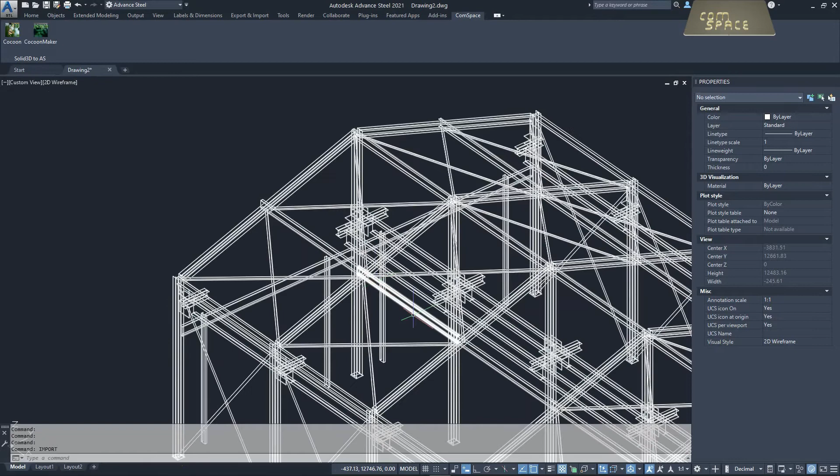Let's see how it looks like. So it looks a little bit like this here. It might have been drawn with an older AutoCAD, might have been drawn with any other CAD application.

So we're not quite sure about these sections. We just know that, well, we live in Australia, so obviously they might have used some Australian sections for this. It might take a little bit of a while to trace this even. It's very repetitive, the design, but well, we want to quickly BIMify this, get a couple of parametric sections out of this source, and we want to see how Cocoon behaves.

So let's get started here. We can work here with our default compiled file.

If you want to specify any project specific or any other files optimized for your environment, because you do a lot of mining, you work with a lot of guys working with some other CAD applications, you can optimize this or reduce the amount of sections it should use as a comparison to find the right section. In this example we are happy.

Let's use the boundary method. Why not? Do we want to have the system line on top? Yeah, why not? Might be maybe also an option.

Because it was probably drawn with an older CAD application, we could assume maybe that any fillets or others are not included, just for simplicity. Maybe it's even a total SolidWorks file. So we have here our tolerance set to 5%, for example, and then accept it.

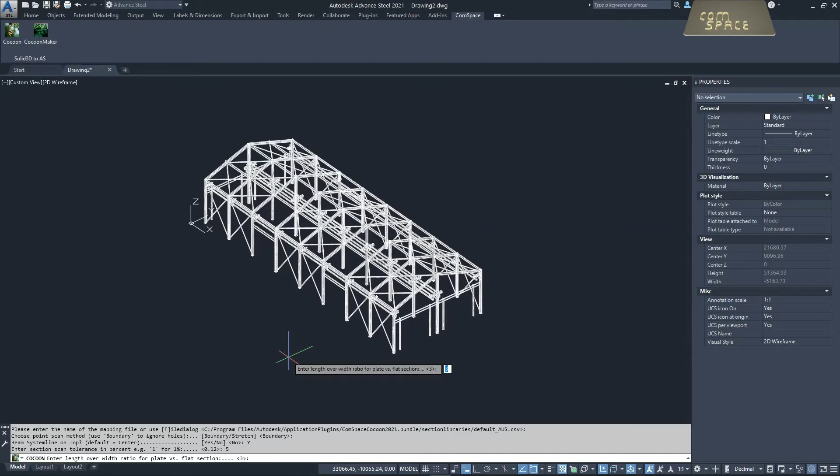And so this gives us a bit the boundary. This means that we have here the bottom plate, for example, that this becomes a plate and this does not become a flat section. It tries to find a flat section for this, but it might be that this bracing here will become a flat section ideally. So we can here speed up this process a little bit. Hence we have here the option to specify this. Let's leave this at 1, 2, 3.

And then we have the next question. So a ratio of 3 is okay, 1, 2, 3, and so this was with our length. So enter the maximum plate thickness.

This is here being thought of. So if we have, for instance, solid blocks underneath, or not every concrete foundation is being turned into a plate, because we want to consider this as well in our multi-selection. So we have here the option to specify, okay, plates go up to 20 millimeters. If you have 34 millimeters or something awkward odd, just please leave it, drop it, mark it please with red. I will have to sort it out in a second go.

All right, so it gives us a little bit of a first feeling. So the maximum what's available in the workshop, we can enter here as well. I have just left it here by default to 20 mil.

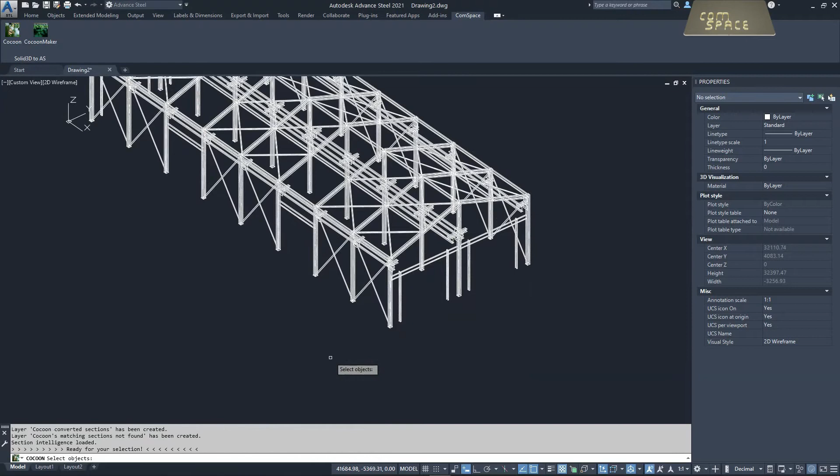Great, so process effects by layers is very useful. And then we can select here all these, whatever, 100 sections, 400 sections it has found, and process with a tiny enter. Great, so it will probably find a few sections, some not.

Let's see how many it found. So when we, for instance, select these, okay, we have 2, so it seems to be quite accurate. So 1 solid, 1 beam. We have here, upsala, and solid. Let's see, come on, be nice to me.

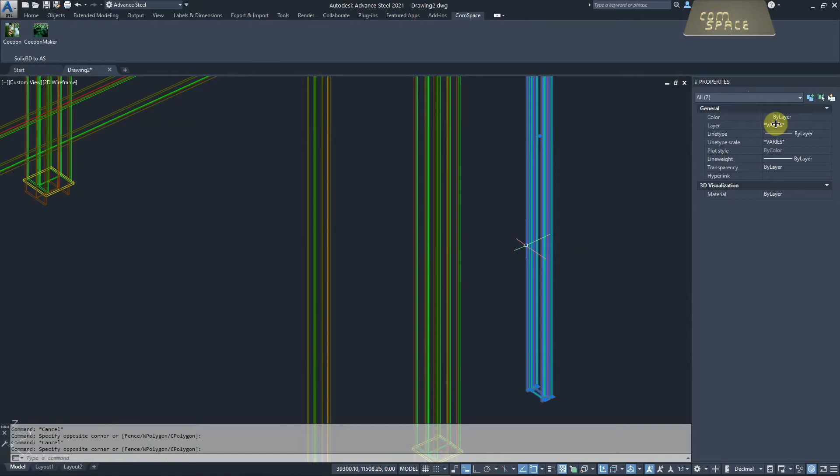What kind of beam do we have? 250, you see, good. What do we have here? Also a beam.

200 PFC, for us, kind of looks all right. Just maybe here it's a little bit flipped, so we can do this. And for the positioning, quickly mirror this the other way around. Apart from this, it looks actually pretty cool.

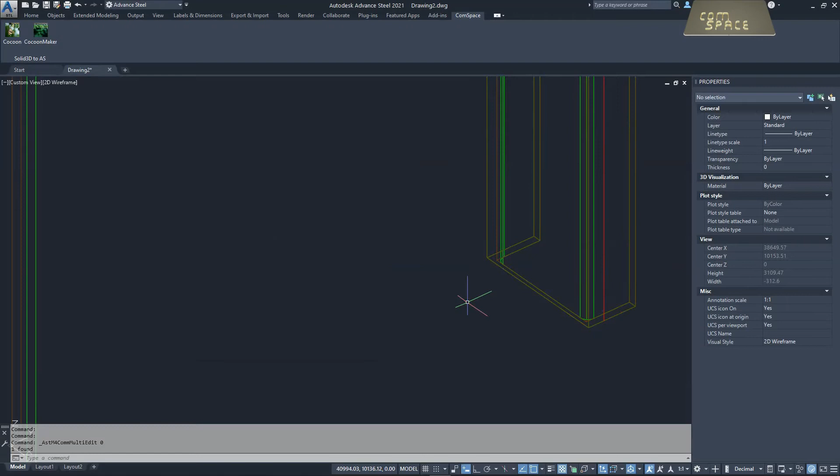It has also here, for instance, the section line, the system lines from our section on the top. We have also here the system line on the top, pretty nice. So if you have this as a workflow, this works.

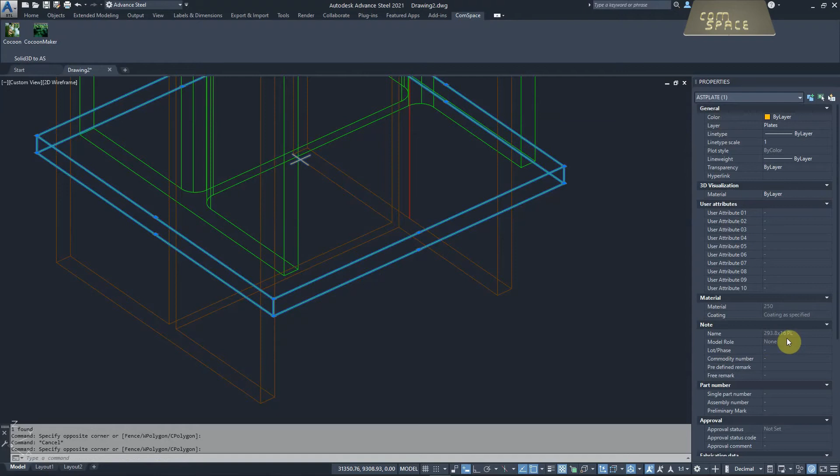It has clearly identified here the base plates as plates in its size. So maybe we still need to correct this a little bit, but well, it is parametric, as we know. Great. So we could then add this afterwards anytime.

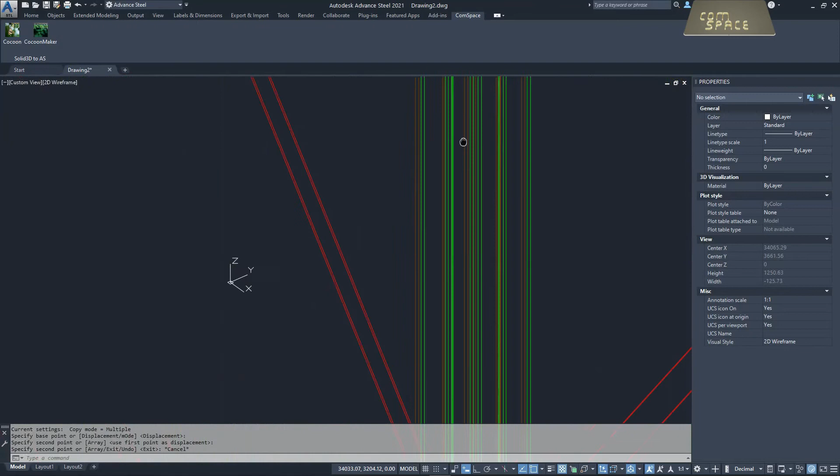We have here some red sections, and let's quickly inspect this, what we have here with the red ones. So I'm just copying this thing a little bit out to inspect this a little bit, and it looks a little bit like a PFC, but well, the PFC would be a little bit thicker. There's the flanges, so it would be a little bit more.

Let's quickly double check. So let's assume we have maybe heaps amount of trusses with this section. So I kind of have to... something it gives me here.

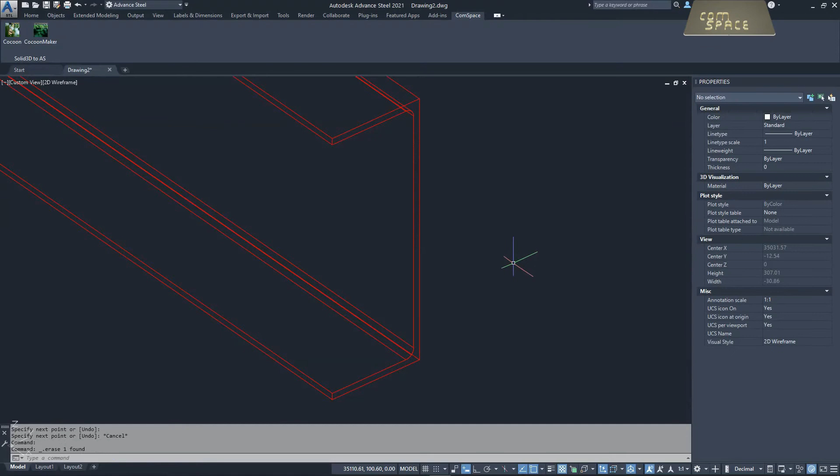I just want to do this a little bit clearer. Yeah. So are you nice to me? Good. Length 250. Okay, maybe it was just not part of my lookup table file.

So let's give it a try. And we have here our Cocoon. Let's specify a little bit of a different file. And we have here all the 214, I think at this point, what is included with Advance Steel already converted for us, as seen in the folder of the section libraries as the profiles.

And well, we know that maybe somebody in Australia has used this, and which might be maybe, well, let's see, maybe it's a CC file. So because I think the CC is not included in the default. So let's check this out here.

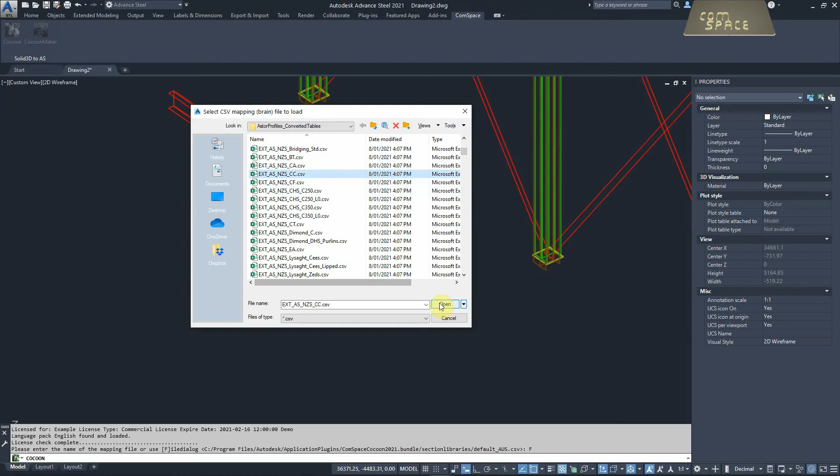Open this up here. Yes, let's work with boundary on the top. Yes, why not? And give a little bit of a tolerance with it, and then mark it up. Does this work? Oh yes, we actually were right here. And what do we have here?

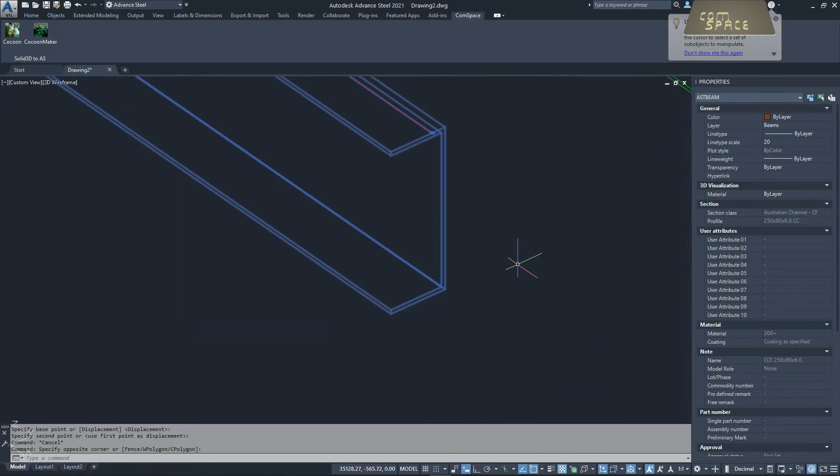Okay, 250 by 90 it was, so a bit quicker than looking it up. So what does this mean? So because we have quickly tested this with this, we can actually quickly rerun it. And remember, that was here my...

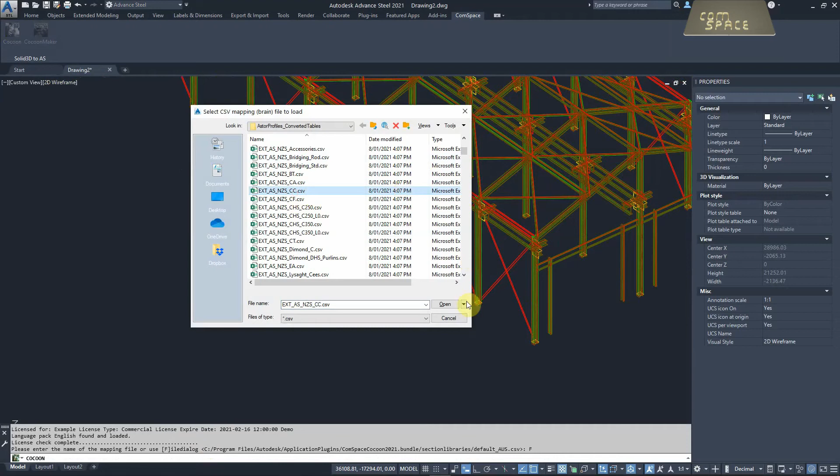Aussie CC file. We can here open this up, have here our boundary. Yes, we have it on the top, the system line. We gave it a bit of a tolerance by layer, and then we could theoretically here now select all the other ones and quickly let Cocoon...

Manage this for us. So Cocoon actually comes from the conversion of a caterpillar to butterfly, while a solid is like a caterpillar, but an Advance Steel section is like a butterfly. So because it's parametric, it's beautiful, you can change it, it can fly, you can do literally anything with these, you can detail it, it's automized, so it's kind of a parametric section. Hence this is how we actually need to choose the name for that.

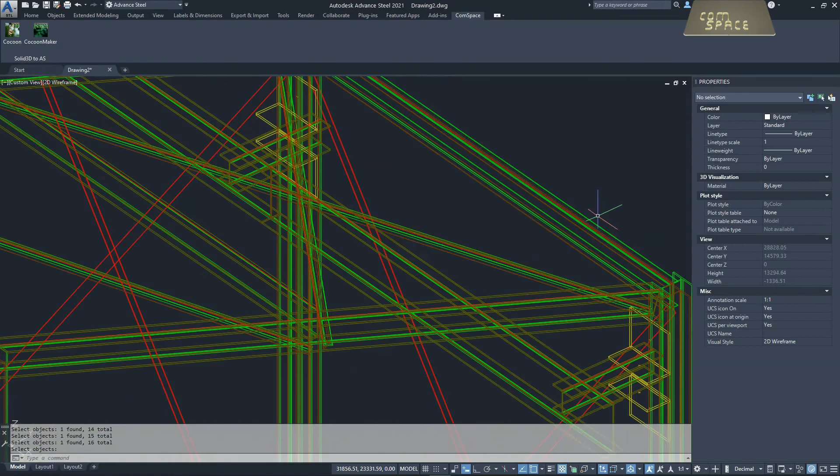So convert it, and then we are actually pretty happy with it for that. Good. What are the other red ones here? Let's find out what we have here. Just a solid one, no information at all is being part of it, and so what do we need to do now? Find it out.

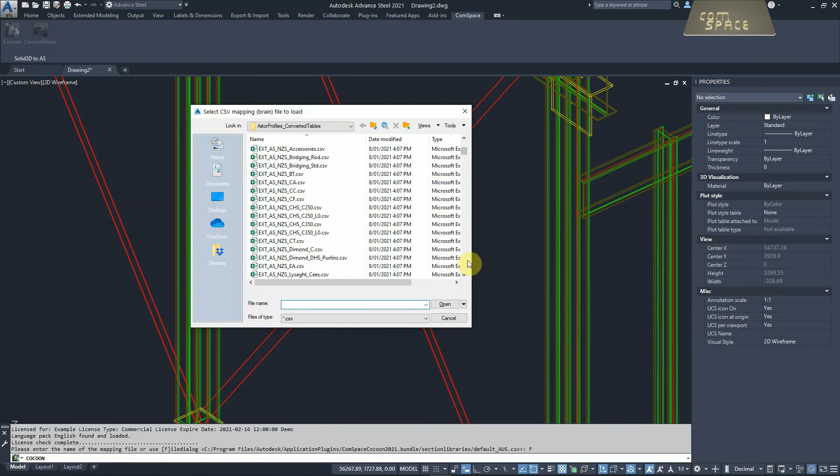Well, maybe the CFs are not part of the default. So hence I could actually for the next time compile my own default. And so let's say if you have this CF here, and let's say boundary, yes, maybe give it a little bit of a tolerance maybe, and then let's see if it is nice to me.

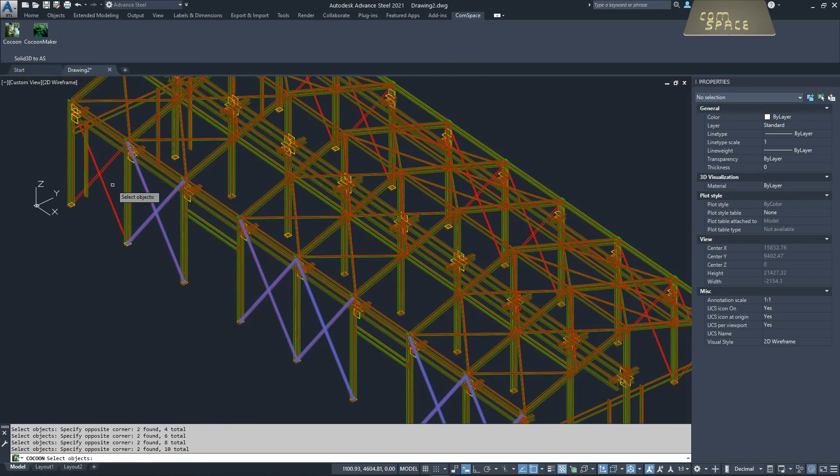Select them all. I could actually also do a multi-selection because it would not find the other ones, because it only looks for solids actually. But as a German engineer, I'm a little bit reluctant to solve.

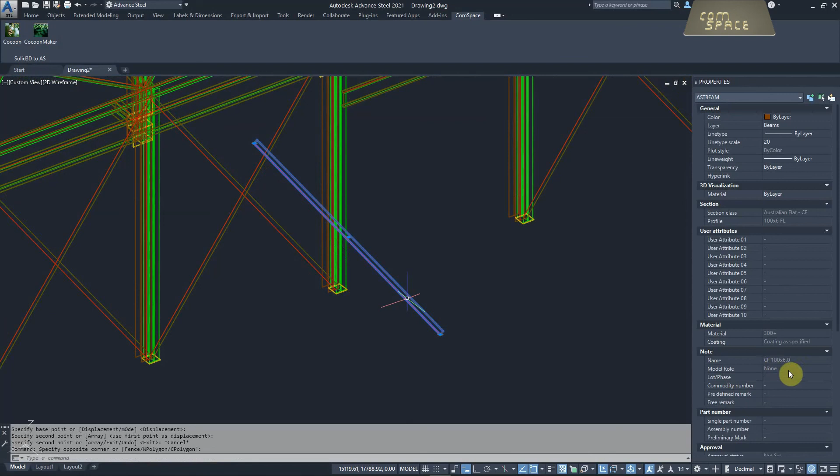Beautiful. And what do we have with the CFs? Let's quickly copy this, quickly compare it, and it's a 100 by 6 flat. Yes, very good. So you see how we have these 400 sections just in a few minutes, how we have converted those. And so these are now parametric.

I can now start my automated routines with connection details, running shop drawings, performing changes, performing the alteration, looking after the alteration, designing the alterations, exporting it to Revit, Robot, wherever I want to go. And so it's speeded up the process tremendously.

Okay, so this is kind of a full job, how it could work out. So the key is that we have the reference tables optimized, set, but you see it is possible.